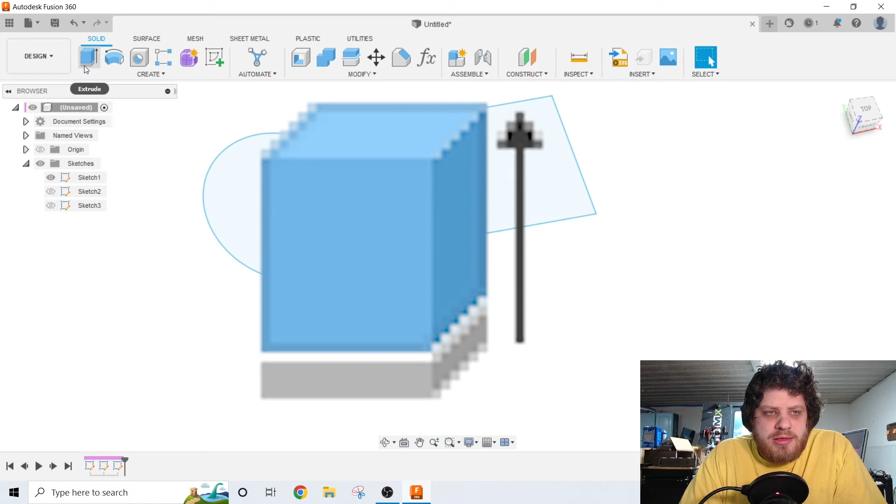This is the Extrude button, and this is what it does. It takes a 2D sketch and makes it into a 3D shape. You can also use it, instead of creating a shape, to cut into a shape. Or you can even take a simple 2D line and bring it into 3D, giving it a little bit of thickness.

When you first press the Extrude button, you're going to notice right here at the top of the menu, you have two different options for how to do an extrude. You can do a traditional extrude, or what Fusion calls a thin extrude. For a traditional extrude, you need a closed shape. For a thin extrude, you can extrude a single line. Let's start off by talking about the traditional extrude.

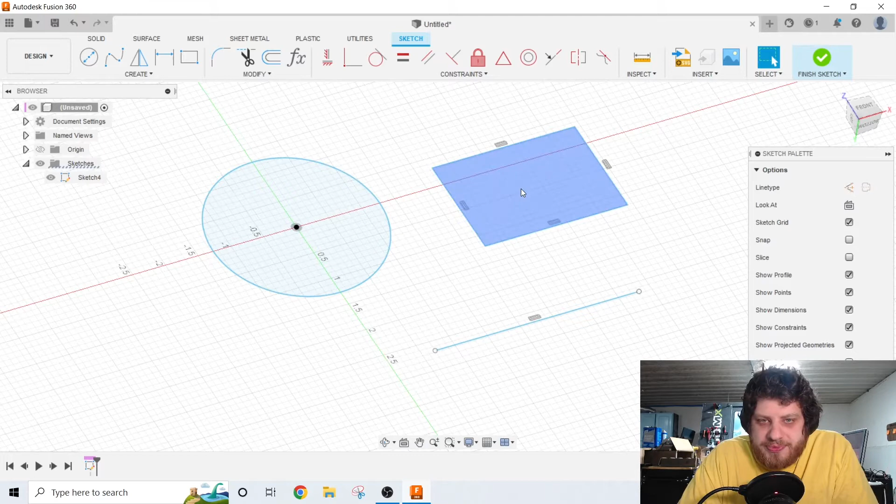In almost every case, you need a sketch before you can do an extrude. If you look here at these simple shapes, you'll notice that they are filled in with blue, and then when I move my mouse over them, they turn a darker blue. That means it is a fully enclosed shape and ready for the traditional extrude.

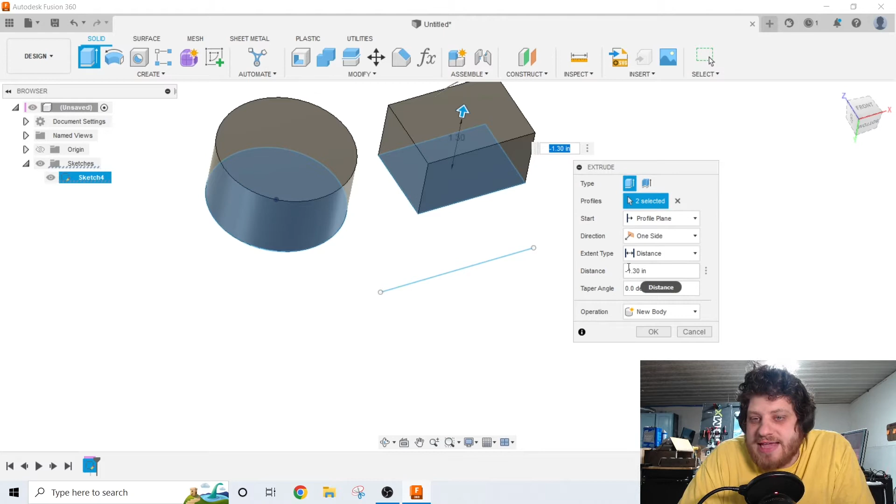To extrude these simple shapes, I'm just going to hit Finish Sketch, come back, hit my Extrude button, and then I can just select my profiles and use this arrow to start dragging them out. Notice I can drag the arrow either way to control the direction of this extrude, and this manifests itself down here in this distance bar as either a negative or a positive value.

If you are trying to hit a specific value, I generally recommend pulling the extrude in the direction you want it to go and then typing in your specific value with the correct sign. If you already have a 3D body, you can use the same extrude command to cut into that shape instead of adding additional shape. In this case, you can see that the preview is red. That indicates that I am cutting instead of adding more material.

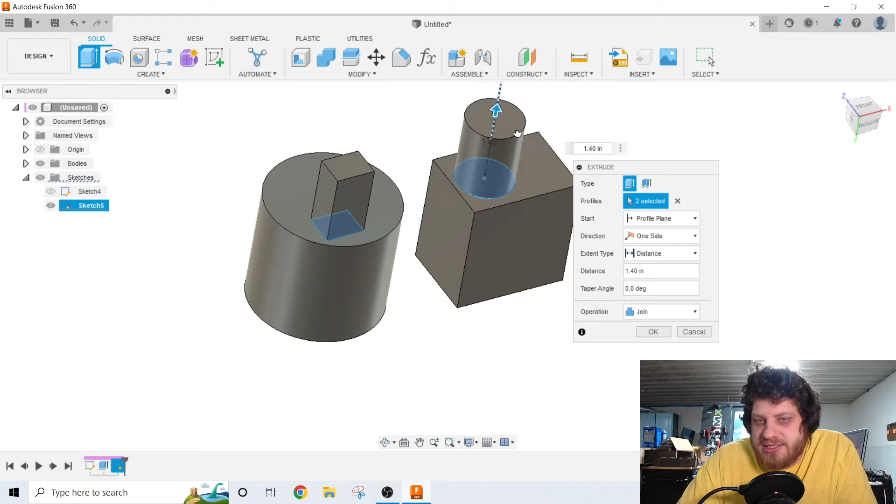Fusion will do its best to guess if you want to add material or remove material based on context. However, you can override its assumption down here in this menu. If you would like to add more material, you can select Join. If you'd like to remove material, you can select Cut. We'll get to the other options later. To finish this cut, I'm just going to hit OK, and now I have a hole in these basic shapes here.

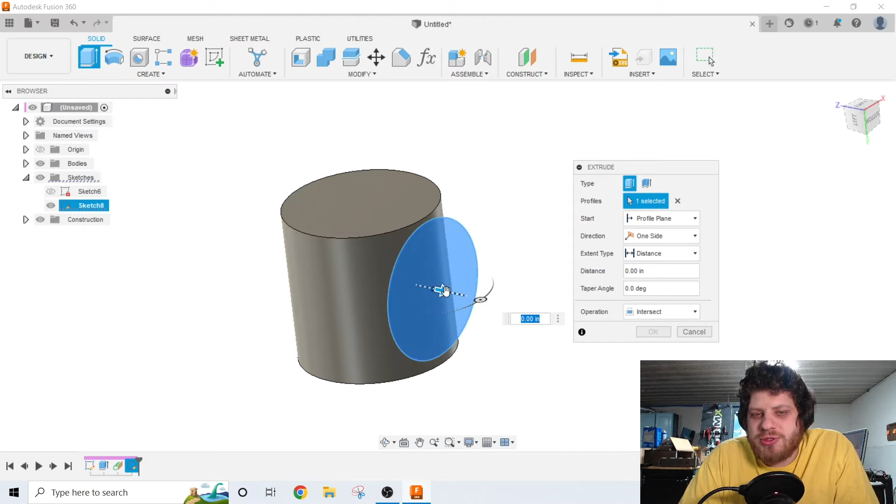Getting just slightly more complicated, you also have the option of preserving material only where your new extrude intersects with an existing body. This is done down here with the intersect operation. And if I hit OK here, you'll notice we have a cylinder from this direction and a cylinder from this direction, giving us this funny shape here.

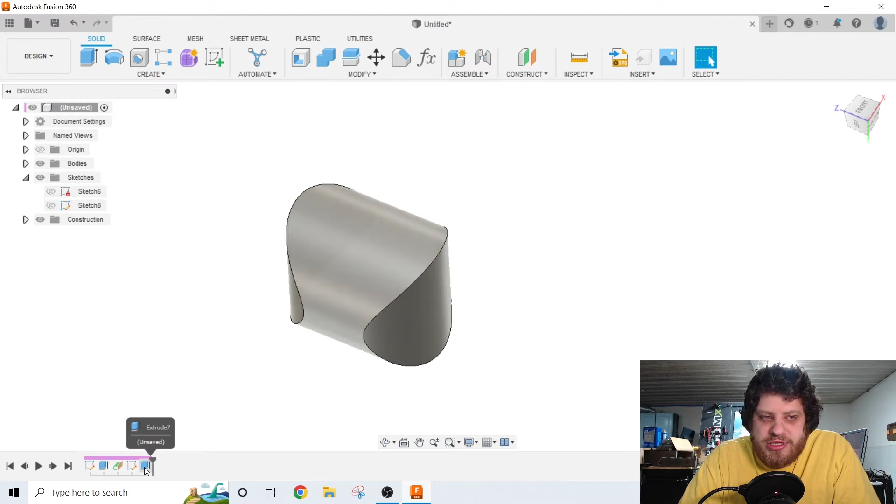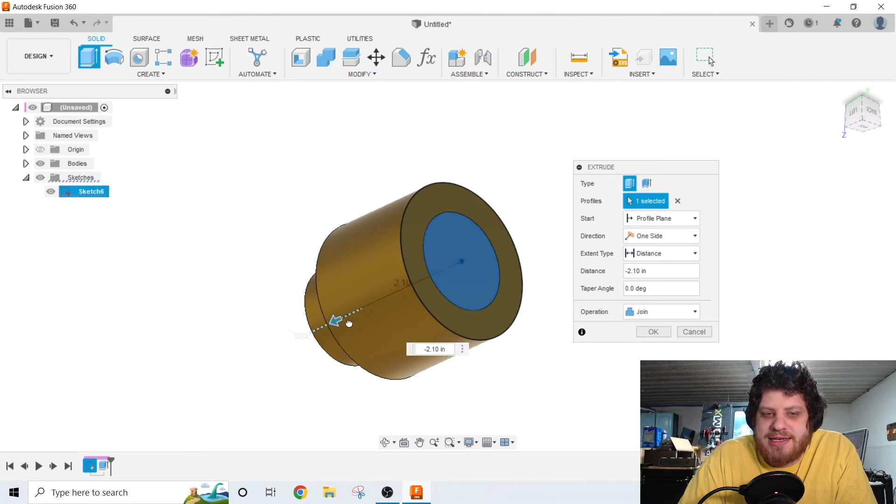If you need to go back and edit an extrude, you can do that down here on the timeline by right-clicking and hitting Edit Feature. Then you have all the options that you can change however you need to. Inside this Operation tab in the Extrude menu, there are two additional options. You can create a new body or a new component. Both of these essentially do the same thing. They just put the results of your extrude in a different place inside the tree over here on the left.

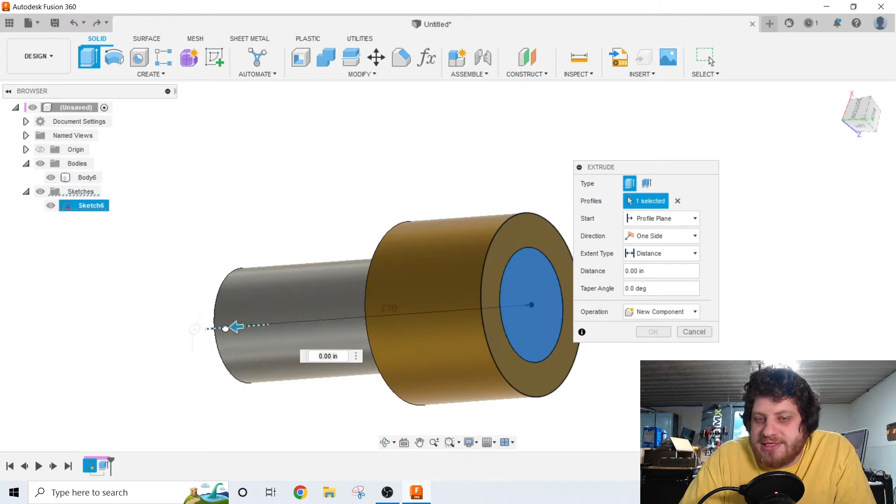If you choose to extrude as a new body, you will be adding more material to your model, but the two different parts will remain distinct from each other. So if I hit OK here, you can notice that I can show and hide this new body, and I can even use the Move tool to move this around. Extruding as a new component works in a very similar manner, except now you don't even have to use the Move tool to move it around, and you can create a joint between your different parts to lock them in place.

By default, the extrusion will always start wherever your base sketch is. However, sometimes it is convenient to move the starting point to somewhere else. You can change this with this menu right here that is labeled Start. By default, it is set to Profile Plane. The Profile Plane is just the plane that contains the sketch that you're using for the extrusion. But you're not limited to just using that plane.

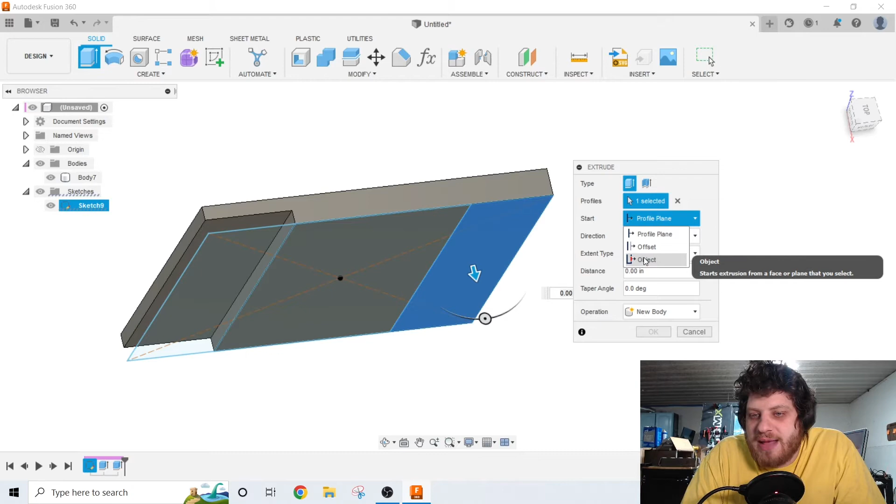Sometimes it's convenient to keep all of your geometry in one sketch. Then you can use either an offset or an object to define where your extrude is going to start. For example, I'm going to hit Object and then click on this plane here on the opposite side as my sketch. And when I drag down this extrude, you'll notice that instead of starting from the bottom, like on this one on the left, it is starting at the top. Offset works in the exact same way, but instead of selecting a piece of geometry to define your starting point, you can just type in a value.

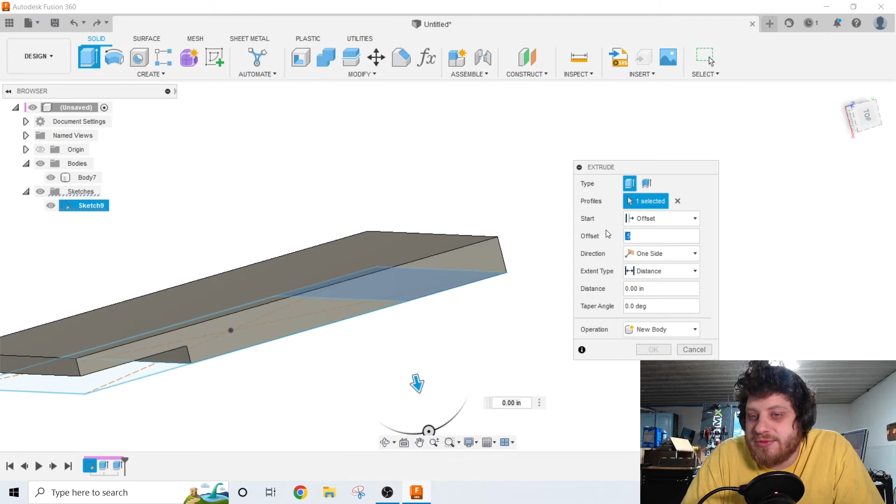So like in this case, we can do -0.5 and then extrude down into our part. In the next little box down, you can choose if your extrude's going to go in one direction or two directions. So by default, it only goes in one direction, the direction you move the arrow in, but you can change it to symmetric, where it'll maintain a mirror image.

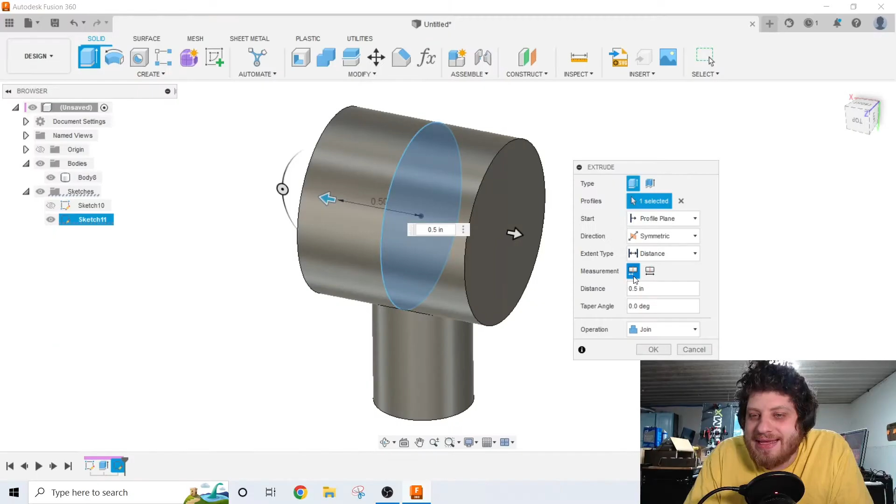These two little boxes here control whether the dimension you type in is from the center plane to the face of the part, or from one face to the opposite face. Think of it as radius versus diameter. This first button is the equivalent of radius. It does it from the center plane to one side. The second button here is like diameter, where it measures from face to face.

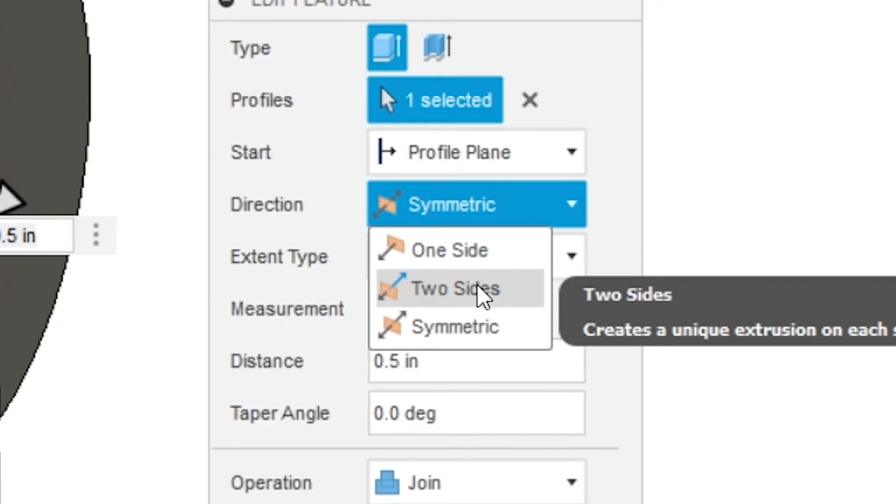You also have the option of making it asymmetrical by choosing the option here that is just labeled Two Sides. This works just like symmetric, except you have the ability to control each side independently from each other. Just like the start options let you choose where the extrusion starts, the extent type options will let you choose where it ends. The default option is distance, so you can just type in an exact number of where you want the extrusion to stop.

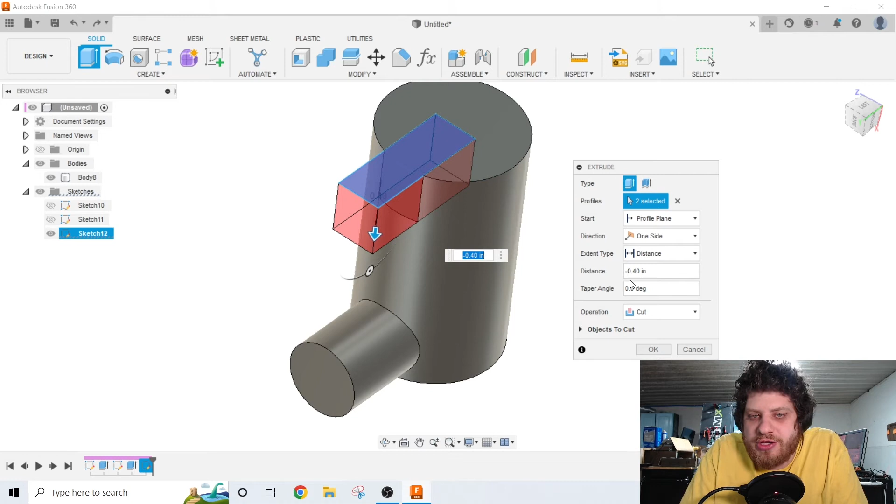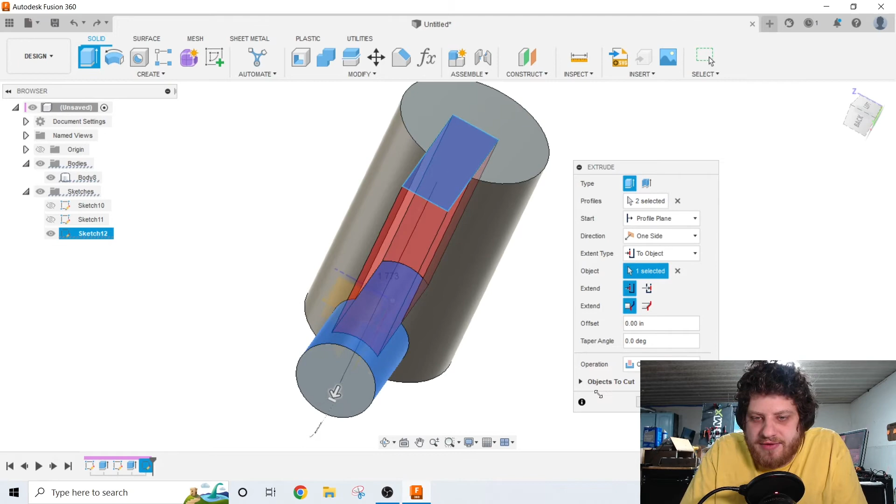But if you are doing a cut, you also have the option of going through everything, or you have the option of extruding to an object. When you click to object, it'll pop up this new selection menu where you can select a face or a point, and the extrusion will go to that face or point. In this case, it even maintains the cylindricalness of that cylinder when I hit OK here. If I extrude to a point, like the top point of the cylinder here, it'll not follow the cylindrical shape of the cylinder, and instead, it'll create a plane that is just tangent to the cylinder.

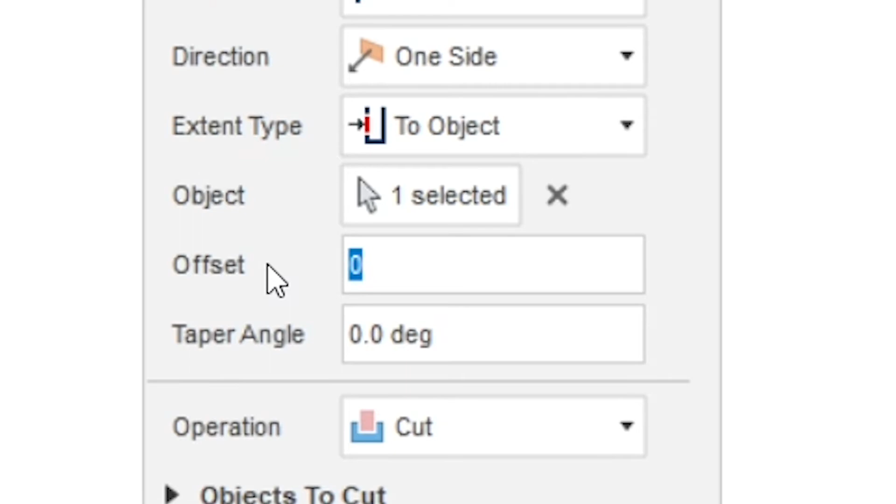If you don't want to quite go all the way to whatever object you've selected, you can assign an offset right here in this box. If I hit OK, you'll notice there is a little gap between the cylinder and the bottom of that extrusion.

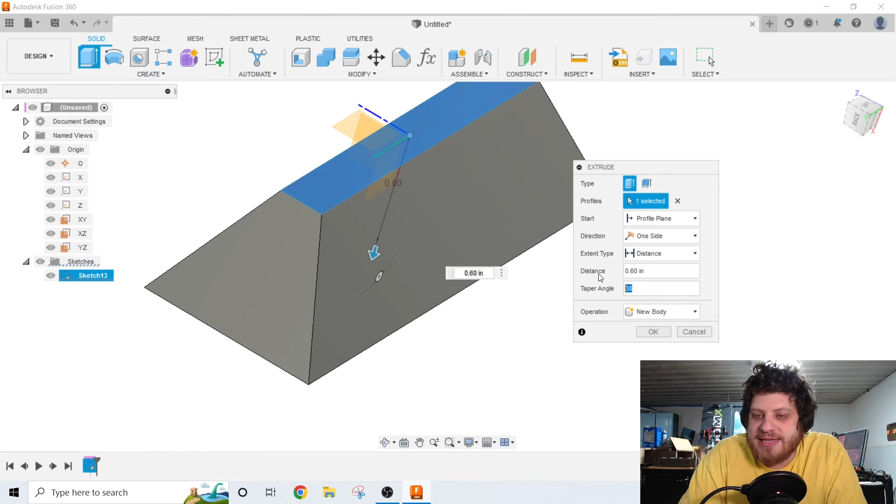If you are designing something that is wedge-shaped, you can add a taper down here in this last box. So if I do a 5-degree taper, it'll flare out the base here. Here, we can go to 30 to make it a little bit more obvious what it's doing. Or you can type in a negative taper to taper in instead of out. The taper feature works both in join mode and also subtractive mode, cut mode.

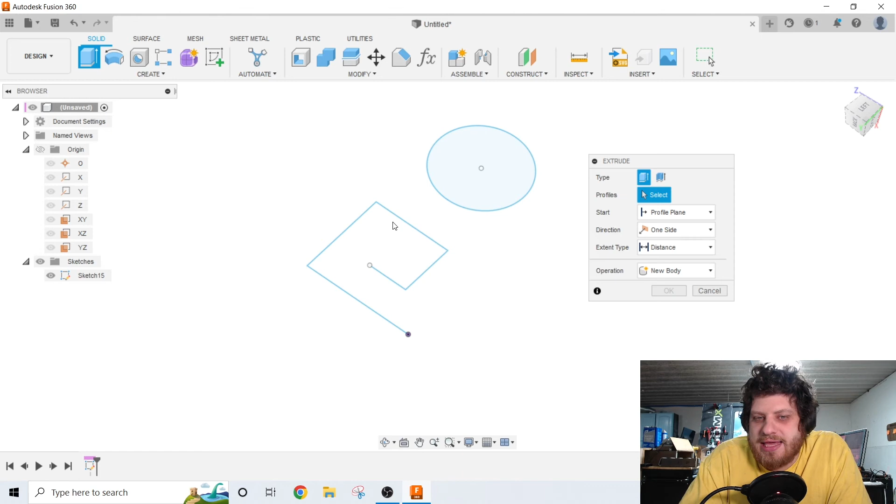So far, we've covered everything you need to know about the traditional extrude method, but there's also this new thin extrude option. The main difference between the two is the sketch that you are using to create your extrusion. With the traditional extrude, you must choose a closed profile. So this little curly Q here does not work. However, this circle does. But with a thin extrude, I can use either one. The thin extrude basically just creates a wall instead of a solid block.

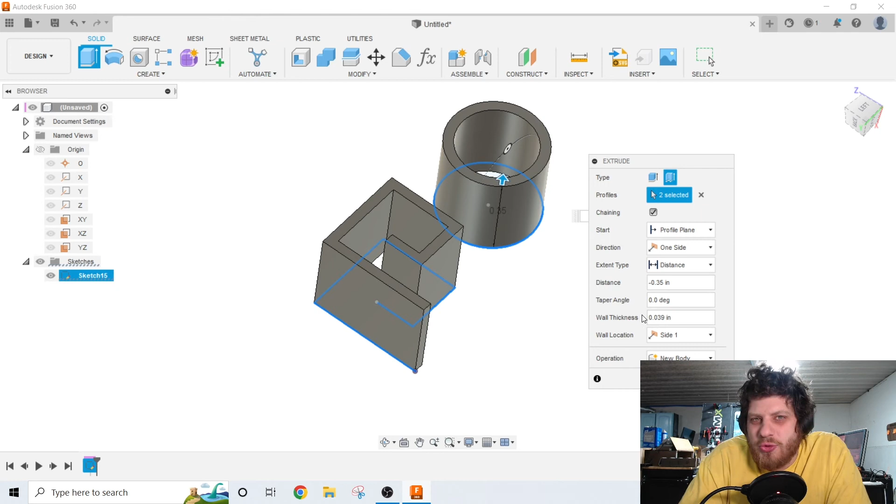Just like with the traditional extrude, you can change the direction, the start point, the end point. You can even add a taper angle. The only difference is that you get two additional options. The wall thickness, which is pretty self-explanatory. It changes the thickness of the wall. But then you also have the option of changing the wall location. And this is where the wall is relative to your sketch line.

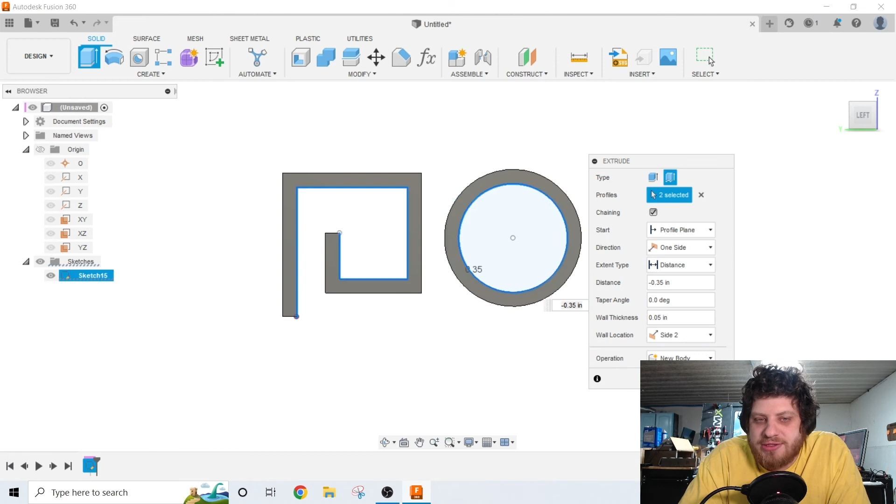So the default is side 1. You can see that the wall is on the inside of my line. If I go to side 2, the wall will be on the outside of my line, and center, it'll be in the center. The only other quirk here is this little checkbox that is called chaining. If you have chaining on, it'll select the whole profile, but if you turn chaining off, it'll just select one line at a time. And that is absolutely everything you need to know about the Extrude button.